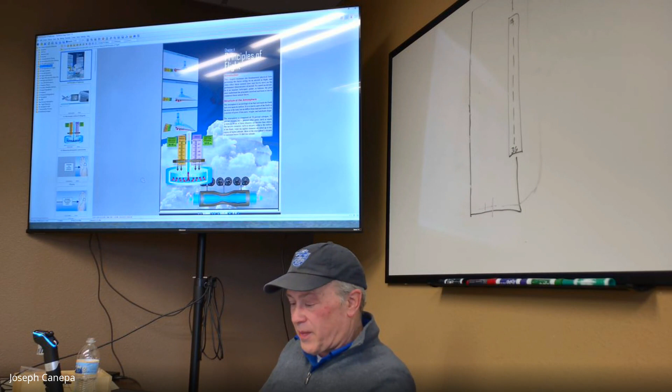I was hoping, I don't know if Vaughn is going to be here at all today. I haven't heard from her. So Vaughn Benson is another flight instructor, and she's going to get each of you signed up for the Young Eagles program, which in turn will get you the Sporty's private pilot program. It's like $300 for free. It's just included with it.

And it follows along with what we cover in the book. It's just another set of materials. They've got really good quizzes on there. It's just really nice material. So if she does come in, we'll have you guys come out, we'll visit with her for a second. She'll get you registered for Young Eagles, and then you'll get this free Sporty's program. And like I said, you could use it along with the ASA material if you want. So it's just another tool to help you understand some stuff.

And then next week, Ethan's dad, if he's still planning on doing this, was going to come in. Ethan's dad, Weston, is it Paper? Yeah. Paper is American Airlines. And he's also, correct me if I'm wrong on this, but he was a wing commander, right, in Madison. Okay, yeah. So he was military aviation. So he's going to come in and he'll be answering any of your questions. Aviation, commercial aviation, and then also military aviation.

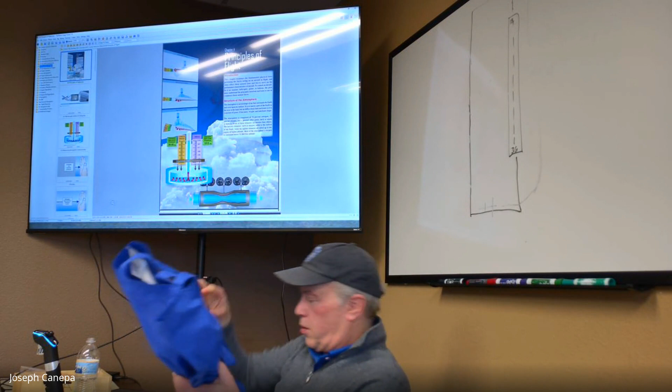So, morning. And what is your name? Traven. Traven. Okay, yes. You've been watching online, Traven? Yep. Do you have a kit? Okay. There you go, sir. Thank you. All right. And I think we'll just go ahead and get started. So let's hold that thought. I don't have anybody else. No. All right.

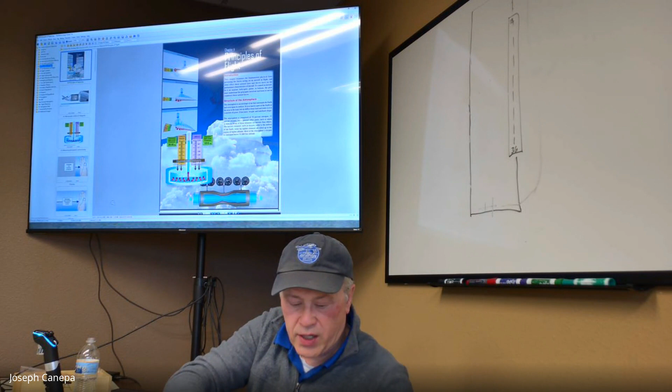So we're going to be going through chapter 4 this week, principles of flight. We're probably going to get into chapter 5. Chapter 4 is fairly short, but it's got some pretty complex stuff that we're going to need to understand before we move on to chapter 5. So if you want to put your books to that, it's 4-1 or 2 actually to start on. And actually, let's do just for like 5 minutes a quick review of what we talked about last week before we dive into this.

So I want to bring up our simulation here. Okay. So do you see those surfaces that are moving on the plane there? Does anybody know what those are? Ailerons. Okay, what about these surfaces right here? Flaps. Those are called the flaps. Okay, how about this one right here? What's that called? Yep. Okay. This right here. Yeah. Perfect. All right. Good.

And does anybody remember the different parts of the aircraft there? Okay, so let's actually go right here. What's that? Power plant, nose. Yep. Then obviously you probably know what this is right here. And then this whole area right here. And then this right here. Empennage. Right. We didn't talk about too much other than that. We've got obviously the tricycle landing gear. We talked a little bit about that.

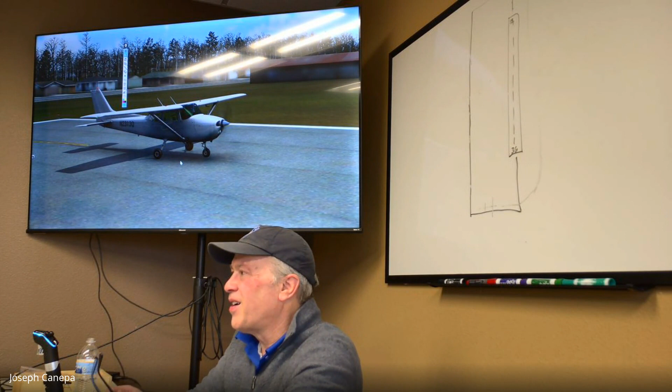For bonus points, does anybody know what a conventional gear aircraft looks like, or one distinctive factor of conventional gear? Instead of having the third wheel on the front, it's on the back. Yeah. This is a tricycle gear aircraft, and you know that because the gear is in the front. What Donnie says is for a conventional gear aircraft, the gear is in the back. It's usually like a little tire like this. We call them tail draggers. That's a term for them.

But usually what they'll do is they'll move the tires or the landing gear closer up front instead of having them back here. So that's essentially what a conventional gear aircraft is like. So again, tricycle gear aircraft is going to be something like that there. Okay. Gosh, there's not really much anything else that we talked about. Oh well, let's do this. So, the axes of flight.

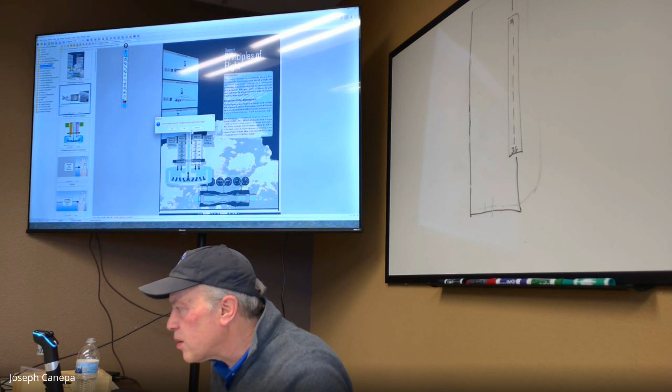So let's dive back into what we're starting out with today. Okay, so principles of flight. So we're going to talk a lot about air and what it is, what its qualities are. So you don't think about this, but air is actually a fluid. Okay, it flows, and it has weight to it. You don't think about that either. Does anybody know how much a column of air weighs? Like a square inch of air, if we were to actually weigh it. I'll give you a hint. You hear it occasionally in physics. You'll hear the term PSI, which stands for pounds per square inch.

Is that what you say? 15? Did you say 15? Okay. So you said about 5 to 10. Okay. It's actually about, you're close, 14.7 pounds per square inch. So this is hard to understand because we're living in all this air, down here on Earth, and we're used to the atmospheric pressure, which is roughly 14.7 pounds per square inch that's acting on the body, right?

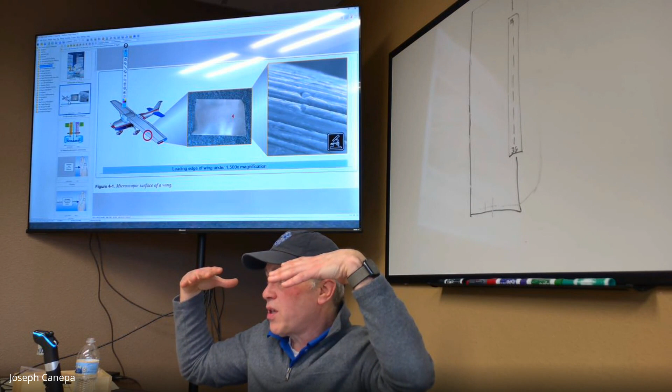So if I were to take a column that's essentially a square inch, fill it with air, and then just hold it in my hand, I would feel 14.7 pounds per square inch on the hand. And of course, I can't feel that because we're already feeling it all around our bodies right now. But if we were to weigh it, it would be 14.7 pounds per square inch. So air is a fluid, and it has weight.

The further you go up, so let's go up to 30,000 feet. Let's take that same column of air in this tube. Let's go to 30,000 feet. If we weigh it up there, is it going to be heavier or lighter? Lighter. Yeah, definitely. Okay, and we go further up, it's going to be even lighter. That should tell you something. That's something we're going to apply a lot in aviation, especially when we start getting into altimeters and talking about atmospheric pressure and stuff like that. It all relates to the pressure that we're feeling down here. So air is a fluid, and it has weight.

So in the book, they talk about viscosity. You're never going to see that on the written test. I don't even know if you'll see it on the commercial test, to be honest. But we do want to talk about it because viscosity does play into aerodynamics. So when we think of molasses, we think of a slow-moving fluid. Air has a viscosity, but it flows fast. Or another one to use would be water. So if we pour water down a ramp, it's going to go relatively fast down that ramp. If we pour syrup or oil down it, it's going to go a lot slower.

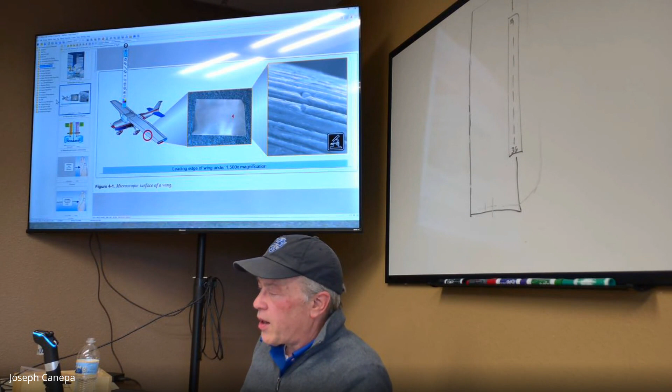Yeah. So there is drag on it. Yes, and I wasn't thinking about it in terms of that, but it essentially is drag. It's what we would consider parasitic drag. But the rest of you don't worry about it. We're going to get into that later on.

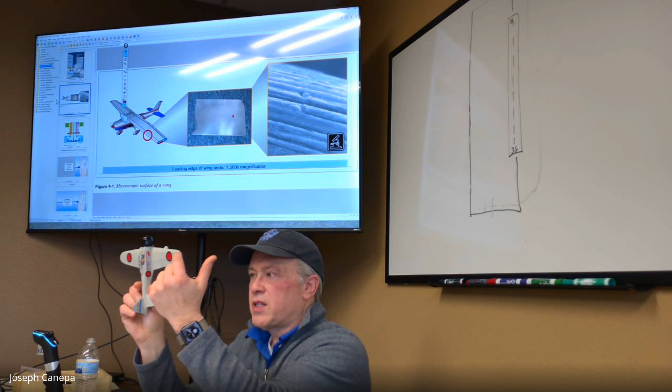So again, even what looks like a smooth surface is going to have some roughness to it. So here's a typical aircraft wing. You can see all these little lines on it. These are the rivet lines, so this would be like an aluminum aircraft. Those would be the rivets and stuff like that. They all create drag or friction in the aircraft.

So some airplanes like the Cirrus, they're made of composite materials and there's no rivets on them. So what you're going to see is a nice smooth surface. So the air is going to flow over that a lot smoother. There's not going to be any resistance to it. Okay.

And then this is on the next page, 4-3, atmospheric pressure. We've talked a little bit about that. So there is what's called a standard atmosphere. This is something you're going to want to know. You're going to see a ton of questions on this on the FAA written test. Essentially, a standard atmosphere is a way for us as engineers, as pilots, or whatever, to communicate performance figures.

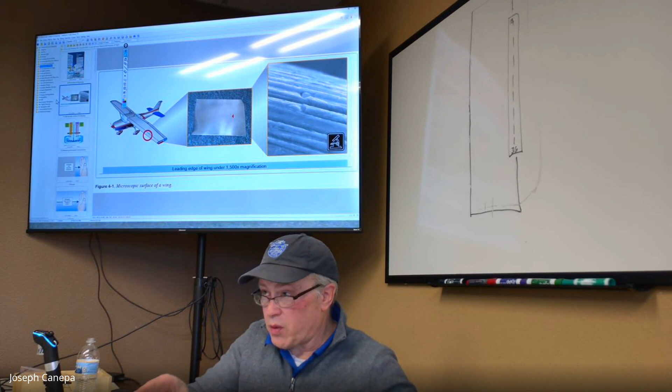Because the atmospheric pressure changes from one place to the next. If I drive over to Bearwood, the pressure there is going to be slightly different, because you've got changes in the atmosphere and the temperature. They all affect atmospheric pressure. Have you ever looked at a weather map and seen those little isobaric lines showing the pressure, like 29.8 or something like that? They're actually talking about air pressure at that station.

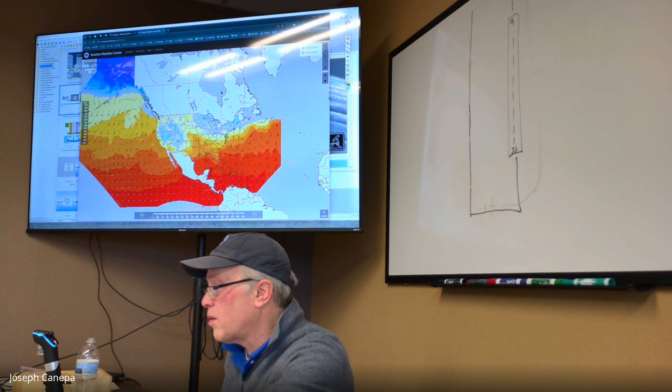So let's see here. Maybe I can bring one up. Give me a second. I'm just going to see if I can bring up another map here. Here. And we have no weather. That's unusual. Usually have some. So here we go. Okay.

So there's two different ways that we measure atmospheric pressure, two different units. One is inches of mercury, and you've probably heard this. A barometer has mercury in it, right? And what does a barometer do? It measures the pressure in the atmosphere.

So if I'm down here on the ground, it's going to be somewhere around 29.92 inches of mercury. It could be as high as 31 point something and as low as 28, which would be really low. We're going to discuss how that works in a second. But what these little isobaric lines do here is show us the inches of mercury. It can also be measured in hectopascals, and that's what this is right here.

Let's see if we can zoom in. Okay, so you see this right here, 1018. That's the hectopascals for that line, and that translates to something in inches of mercury. I don't know what it is off the top of my head, but here it looks like it's going down: 1018, 1016, 1014. So we're going from high pressure here, just north of Minnesota and into Canada, and the pressure is starting to go down.

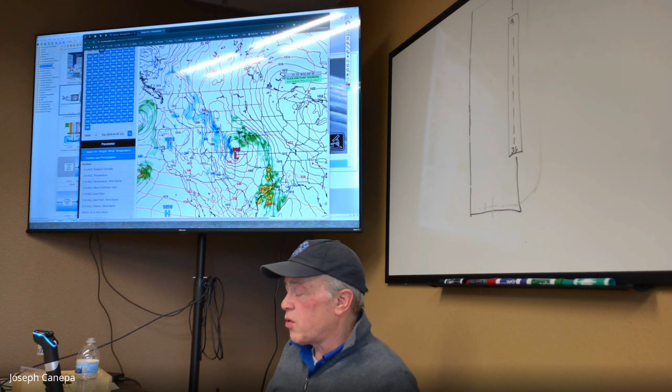So in other words, this hectopascal pressure measurement was made by either an observation station or was calculated through a computer model to calculate the pressure on the surface of the planet, that's what that represents there. Not at 10,000 or 20,000 or 30,000. That would be a totally different pressure. Okay, so now let's go back to our thing.

Now this is where it gets interesting. This is what we're gonna dive into, and hopefully some of you may get this right away and others may not. It's okay if you don't understand this right now, but by the time you're done with the class, you really need to have this concept down. So let's talk about atmospheric pressure.

So the way a barometer works, this right here is a container for the mercury. This area right here is a container, right? It's just like a beaker or something like that. In that beaker, you can see there's a fluid inside this container, and they've cut away this little chunk of the container so you can actually see inside there.

And then in the container of mercury, you've got a tube that's open down here at the base of the container, so the fluid can move up through that. And then there's a tube that goes up, and it's sealed at the top. So this is a basic barometer, and this is what they learned a long time ago, that they could monitor how far up that mercury moved to see if we had relatively high pressure or relatively low pressure in the atmosphere.

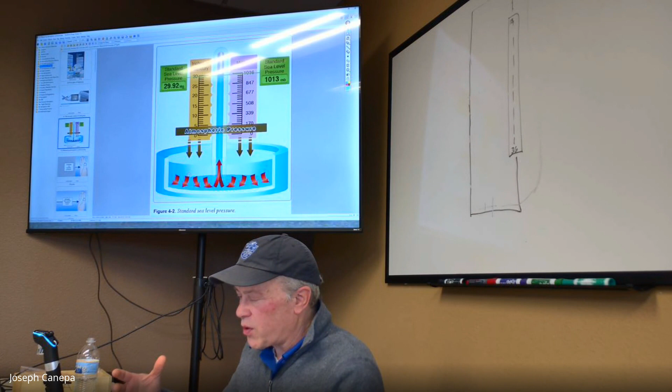So it doesn't do it smoothly. There are different portions of the atmosphere that we're going to get into in another theory, like the troposphere, tropopause, stratosphere, stratopause, and things like that. You don't have to worry about that right now; we're going to deal with that later on. But what we really want to talk about with lapse rate is the standard change in temperature and pressure as you climb.

So this next thing here, on your books you can see this too. There's the standard atmosphere at sea level. Right now we're about 900 feet above sea level. So our standard atmosphere for Reedsburg is going to be 28.86 and 13 degrees Celsius or 55 degrees. That would be a standard atmosphere.

That's not what it is out today because it's non-standard out there. You will very rarely go to an airport and find what's called a standard atmosphere, 15 degrees and 29.92 inches. It just doesn't exist very often. But we need to have that standard so that we can communicate these tables and do formulas for the performance of the aircraft.

But here we start out at sea level. So let's say we're at New York, you know, we're at sea level. So a standard atmosphere there is going to again be 29.92 and 15 degrees Celsius. If we go up 1,000 feet at New York, the pressure is going to what? Increase or decrease? It's going to decrease, yeah.

And you look at it, if you go down and look at the altitudes here, all the way up to 20,000. Here we are at 13 inches for the pressure. For our inches of mercury that we're talking about atmospheric pressure, the barometer would be reading 13.74 inches for a standard day, that is. Okay. And then for the standard temperature up there, it's going to be about, you know, roughly minus 24.6 degrees Celsius.

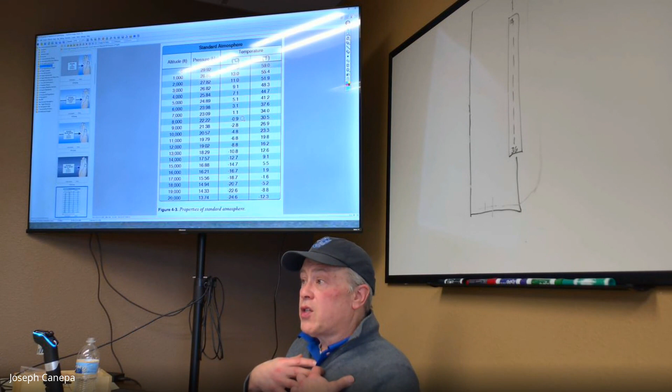Okay, so let's talk a little bit about engines. So engines, in order for an engine to work, it needs fuel, it needs spark, and it needs air.

Yep. Just see here. Okay, I just want to make sure that we're good here.

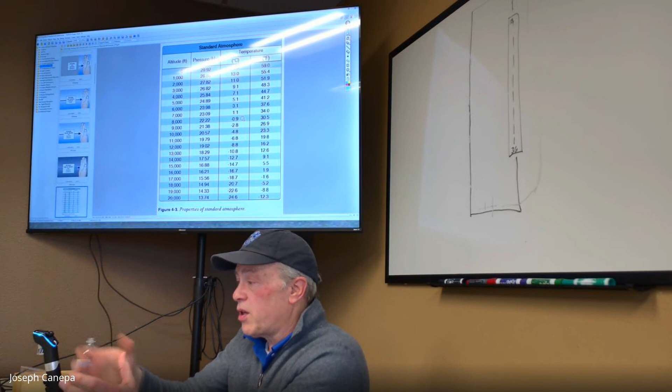Okay, so it needs air to breathe, just like we do. We need air to breathe. An engine needs air to breathe as well. Brings air into the cylinder, it burns that air, expels it. So as you go higher, there's less and less air. So a typical aircraft engine is going to lose power the higher you go, because there's less air up there. So that's one of the reasons why we need to know tables that we have to understand.

You don't have to remember these numbers. You just have to know that every 1,000 feet, you're going to lose about an inch of pressure, and you're going to drop in temperature by about 2 degrees. That's the lapse rate. Okay. That's something you will want to understand, and you definitely want to know this first one up here. So this right here is something you're going to want to know, the 29.92 and 15 degrees Celsius. And if you remember 59 degrees Fahrenheit, that's fine.

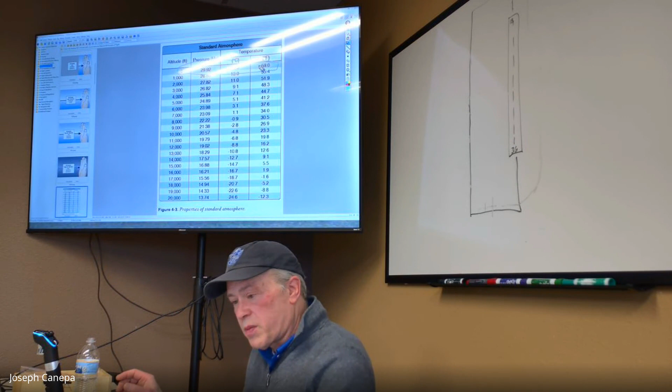You can always convert Celsius to Fahrenheit. I don't know if you know this, but on your E6B, it's got a nice little scale on it that converts Celsius to Fahrenheit. So if you know what Celsius is, you can always convert to Fahrenheit. All right.

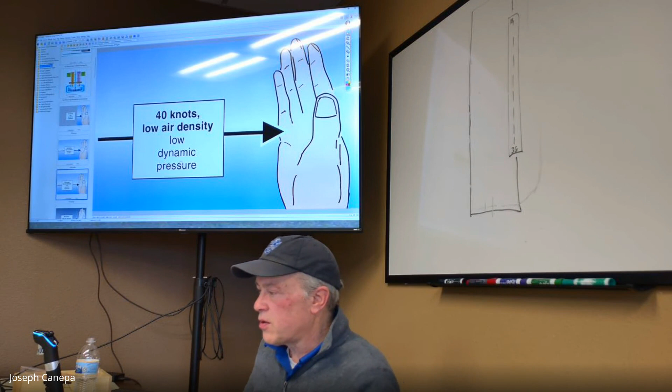So there's a term called pressure altitude that you're going to hear a lot. We use this when we do aircraft performance calculations. So let's see if I've got one here. They don't have anything there. All right, so pressure altitude.

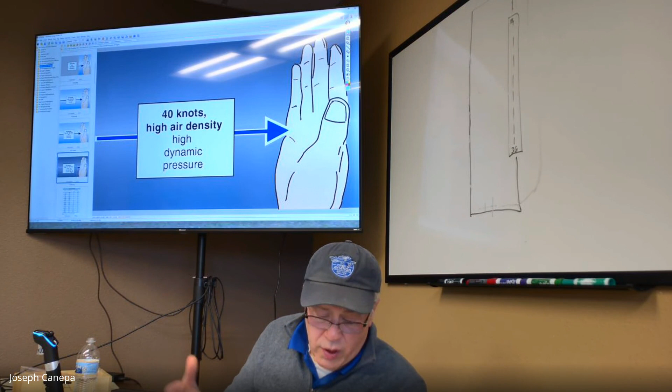In the book, it says pressure altitude is the height above a standard datum plane. Okay, that would be our standard atmosphere of 29.92. This right here. So this is our standard atmosphere at sea level. So pressure altitude is the height above a standard datum plane, which is a theoretical level where the weight of the atmosphere is 29.92 as measured by a barometer.

So we're going to dive into this. I don't want to get into this too much because it's almost too much to present to you right now. We're going to get into this in aircraft performance. You just need to know that pressure altitude is an important calculation when we're doing a long flight. It's not a problem if you're doing a short flight. If I'm flying from here to like Madison, I'm not so concerned about pressure, especially if you do the flight a lot and you're comfortable with the area. Pressure altitude isn't that big of a concern.

But if I'm flying across country, I want to know how well my aircraft is going to perform. And then I need to know these calculations. I need to know what this pressure altitude is and how well my plane is going to perform if I'm doing a long flight.

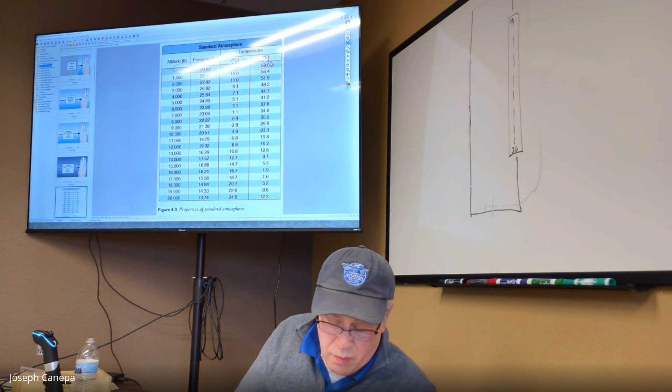Density altitude, let's just read it from the book. The standard datum plane, which again is the 29.92 standard atmosphere, 29.92 and 15 degrees, is a theoretical pressure altitude, but aircraft operate in non-standard atmosphere. Okay, so density altitude takes into account the changes in our atmosphere. We hardly ever come across a standard atmosphere. Like right now, we're in non-standard atmosphere. If I go outside and check the barometer and the temperature, it's not going to be the standard atmosphere. It's going to be something different.

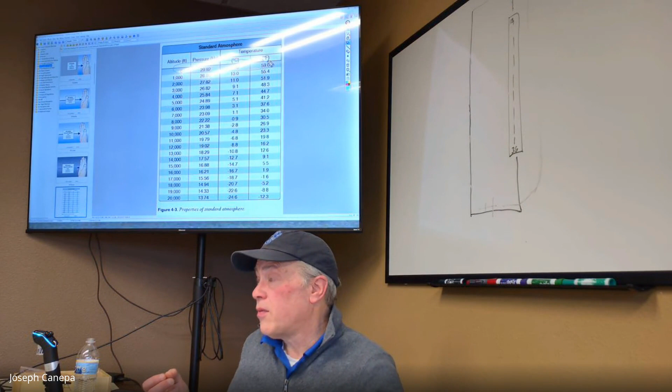So density altitude is basically a theoretical altitude that the plane would operate at if you were to take the temperature and the non-standard pressure of the atmosphere, and then it calculates an altitude. This is going to make more sense when we dive into calculations for performance of the aircraft. But on the test, it's going to ask you, does temperature affect density altitude? You're going to say yes, it does. Understand that temperature affects density altitude.

Well, let's go back a step. We talked about pressure as you climb in an aircraft. We're climbing up into lower pressure, generally speaking, right? So in a standard atmosphere, as the plane climbs, the pressure is going to decrease. What's going to happen to the temperature? It's going to decrease, right? So as I climb, we're going to climb up into cooler air, generally speaking. Now, there are times we have temperature inversions, where when you climb up, you're actually climbing into warmer air instead of colder. We often see that in the summer on a cool night.

So density altitude takes into account that temperature, because cold air, this is an important point. I'll let you guys answer this since you're doing really well. Is cold air more dense or less dense? More dense than warm air, right? So cold air is more dense than warm air. Why do we know this? We can prove it. Anybody ever seen a hot air balloon rise in the air? Yeah. Okay, so just think of a hot air balloon.

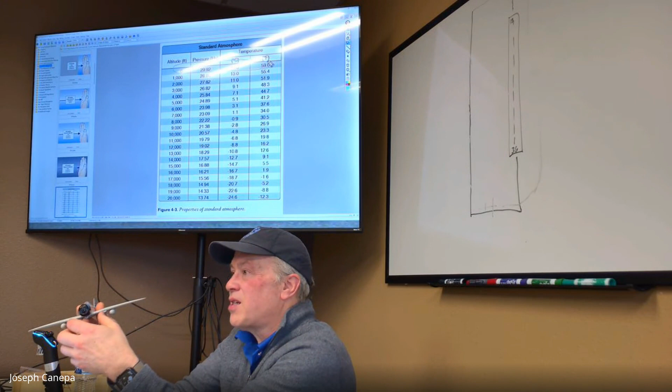The reason a hot air balloon rises is because the air inside the balloon is hot. It's warmer than the surrounding air, and so the balloon rises. So hot air is less dense. A lot of times you'll hear people in the summertime saying, "Oh, it's so hot and muggy out. The air is so heavy." That's not a correct statement. The air is actually extremely thin, and that's why they're having a hard time breathing.

You can correct your friends when they tell you this: "Oh, the air is so heavy on a hot, humid day." It's not. It's very thin on a hot, humid day for two reasons. Number one, it's hot. The other thing is humid air has even less particles in it, so it's less dense. Humid air is actually less dense than dry air.

So if you have a hot, humid day, the air outside is going to feel like it's maybe 4,000 or 5,000 feet altitude. So all that stuff I just described to you relates back to density altitude. Density altitude takes all of this stuff into account, right? It takes the temperature and the pressure, and it puts them together to give you roughly what altitude it feels like outside for your plane and for you.

If you ever want to, you can go on to several different aviation websites. We've got it in the SIA learning site. And you can look at some of the weather reports from all the different airports in the state of Wisconsin. We've got hundreds of them, but these weather reporting stations will report the altimeter setting, which is your atmospheric pressure, and they'll also report your temperature. But sometimes in the summertime they'll include a density altitude. So it'll say density altitude is 4,000 or 3,000.

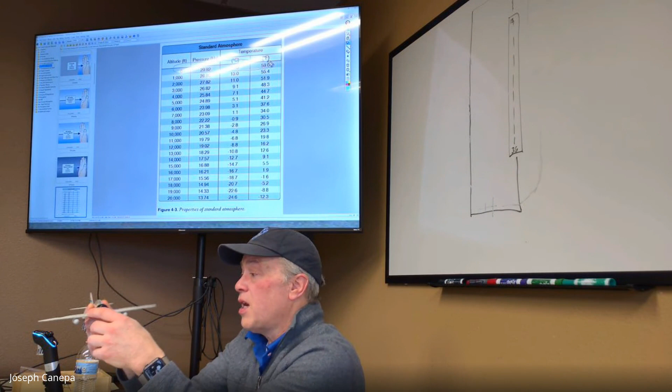So on a hot, humid day in summertime, you will oftentimes see density altitudes of around 3,500 to 4,000 feet. What that's telling you is the plane is going to act as though it's flying at that altitude, 3,500 feet, 4,000 feet. That's important to us because the plane does not perform as well at higher altitudes. You can still fly up there and it'll fly fine, but it's not going to perform as well.

And why is that an important point? Well, when you take off, you need what under the wings to provide lift? You need air. Yeah, absolutely. If you don't have enough air, it's not going to produce enough lift on the wings to get the airplane to climb. And there have been a number of accidents and incidents where pilots have taken off where there was a high density altitude, like out west. This happens a lot. They try to climb, but the plane just won't do it, and they wind up going off the end of the runway and landing in a farmer's field someplace because they didn't take density altitude into consideration.

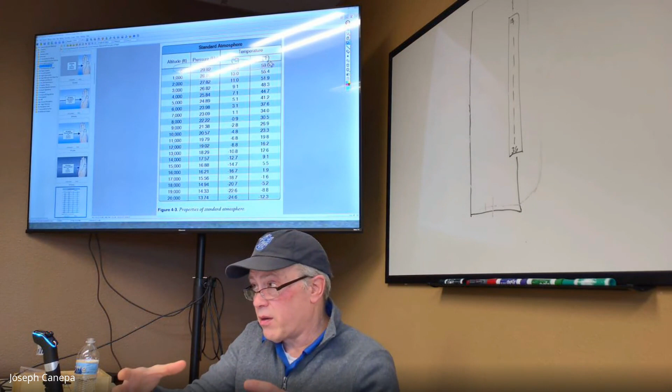Again, if you don't understand all that, it's not the end of the world. We're going to work on this later on when we get into performance and some of the weather theory. So, okay. All right, we talked about moisture. Dry air is heavier, is denser than humid air. Again, big concept. You need to understand that. And again, you can tell your friends when they say the air is really heavy today, it's not. It's very light, and that's why you're having a hard time breathing in the summer.

Okay, so now let's talk about production of lift. This is on page 4.5. There are several different laws that we go by in aviation that help us understand lift. So on 4.5 toward the end there, we'll talk about these one at a time. Newton's first law: every object persists in its state of rest or uniform motion in a straight line unless it is compelled to change that state by forces impressed on it.

Okay, so this little plane right here, I'm just going to set it right there. Can you guys see that? It's just demonstrating Newton's first law. There's no forces acting on it. It's not going to move. It's just sitting there. Now if I push it, I've got a force on it. I'm pushing right here. That's demonstrating Newton's third law: for every action, there's an equal and opposite reaction. So I'm pushing on it, and therefore it's pushing the aircraft.

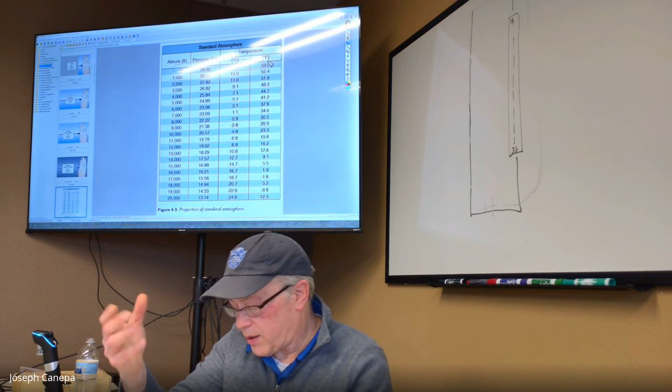All right. So the first law is every object persists in a state of rest or uniform motion in a straight line unless it's compelled to change that state by forces impressed on it. You can read that as much as you want. We don't really talk about that too much in aviation, just because planes move, and generally we're not so concerned about them being on the ground.

We're more concerned about what happens to the aircraft when it's in the air. So again, if an object is at rest, it tends to stay at rest. If I throw the plane, this is part of Newton's first law here. If I throw it, there's forces acting on it, gravity, and it's going to cause the plane to do kind of an arc like that.

All right, so that's demonstrating a little bit of it. It's going to basically follow that line. It's not going to deviate over this way because there's no other forces acting on it other than gravity. Throw it, and it's going to follow a nice little arc down to the ground. Okay. So again, their description, this means that nothing starts or stops moving until some outside force causes it to do so. That's basic common sense there.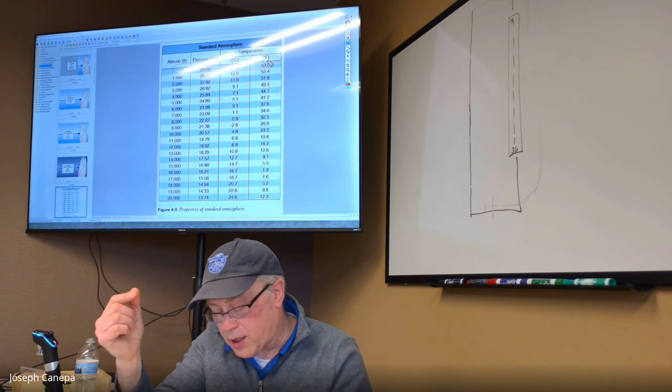Newton's second law: force is equal to the change in the momentum per change in time. So for a constant mass, force equals mass times acceleration. Again, we don't talk about this too much in aviation, but we'll deal with this. This is on the next page here. When a body is acted upon by a constant force, its resulting acceleration is inversely proportional to the mass of the body and is directly proportional to the force applied to it.

So in other words, if I put a lot of force into this and throw it, it's going to go a lot faster as opposed to if I just drop it. Okay, I'm putting more force into it. It's got mass. If it's got lots of mass, if it's like a bowling ball and I throw it, it's going to have a lot of force.

Okay, but in this case, again, we don't really use this too much in aviation. We talk about it maybe a little bit with stalls and other types of maneuvers, just because mass is an important part of aviation. If you're flying a really heavy aircraft, it's going to behave differently than a Cessna 172 or something like that. There's slight differences there.

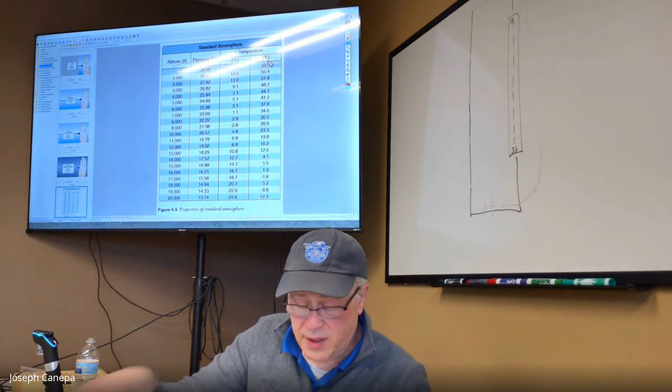So the big one though is Newton's third law, and this one you definitely want to understand. For every action, there is an equal and opposite reaction. So remember that we talked about this a couple of weeks back. You stick your hand out your car window and you hold it up like this. You've got the action of the air hitting that, and then the reaction is your hand kind of moving back and maybe up a little bit, right?

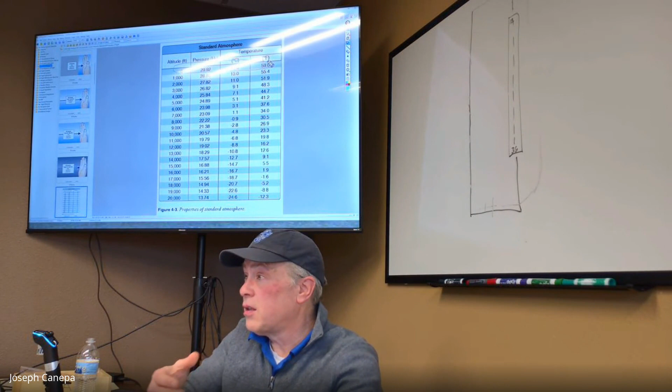Newton's law is stating basically for every action, there's air hitting it. That's the action. The reaction is your hand going up or moving back. That is essentially what helps us get the airplane into the air. Newton's third law. And then there's also another principle that we need to talk about, that is Bernoulli's principle.

So in the simplest way to demonstrate Bernoulli's, let's discuss what Bernoulli's principle is. It states, the faster a fluid moves, well, actually, again, pressure. Okay, so pressure of a moving fluid, liquid or gas, varies with its speed. I want to get this right. Bernoulli's principle states that as the velocity of a moving fluid, a liquid or gas, air, whatever, increases, the pressure within the fluid decreases.

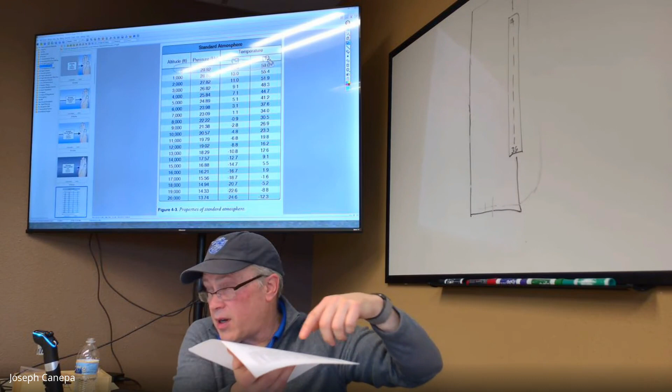Right now, I'm applying pressure to this sheet of paper, okay? So there's relatively high pressure on the bottom and relatively low pressure up here. What Bernoulli said was if I create a flow of air across this sheet of paper, something should happen to it. There should be lower pressure up here. And because there's lower pressure, there should be relatively high pressure below it, right?

Okay, so if I blow over this, we're creating a faster moving fluid, and Bernoulli said if you create a faster moving fluid, the pressure is going to be lower. Okay, that's what Bernoulli said. All right, so let's just demonstrate this. I'm going to try to blow on this as hard as I can. Sometimes it works, sometimes it doesn't.

It depends on the sheet of paper. But if I blow over this, what should happen to this tip of paper right here? Should it go up or down? It should go up if I blow hard enough on it. So let's see. Let's try once.

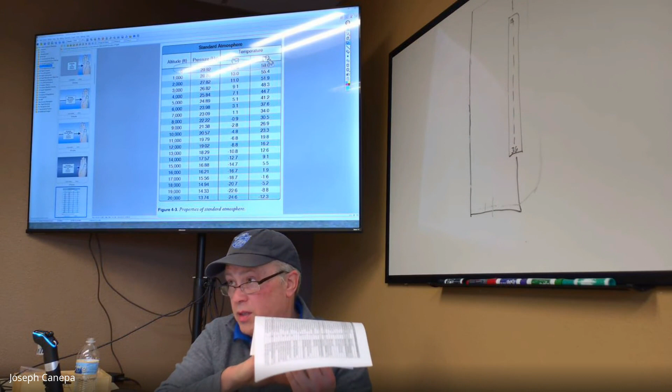Okay, did you see that? How the paper rose there? That was Bernoulli at work. Okay, that's not Newton. That is strictly Bernoulli. So the faster, again, the fluid moves over that surface, the lower the pressure on this side of it, and the relative high pressure is going to cause it to rise.

What you just saw there was basically what now we know as pilots what causes a wing to fly, and it's creating lift, along with Newton. Okay, there's two principles there, Newton and Bernoulli.

Just as a side with that, you could walk into any FBO like this and ask pilots what makes a plane fly. Is it Newton or is it Bernoulli? And you're going to get two totally different answers. Some will argue on it. It's definitely Bernoulli, or it's definitely Newton, or it's both, but it's based on these conditions or something like that. That's something that is still debated to this date.

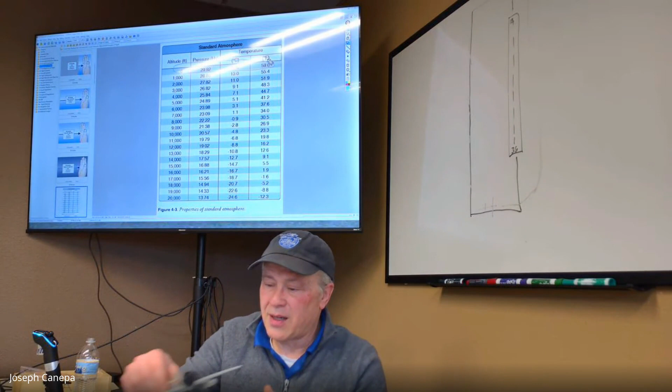Who produces the most lift? Is it Newton's third law, or Bernoulli? And my answer to it is it really depends on the condition of the aircraft. And again, we haven't gotten into this. We're going to do this next session, next hour. We're going to talk about angle of attack. And I think it depends a lot on the angle of attack of the aircraft. But anyway, we'll talk about that in a minute.

So again, that's those two concepts right there. Definitely want to understand that for the test, for the exam. And also to be a good pilot, you need to understand that because, without these basic principles here, you could make decisions as far as flying that are not in your best interest. You need to understand that. So, all right. So let's move on to airfoil design. So let's go here.

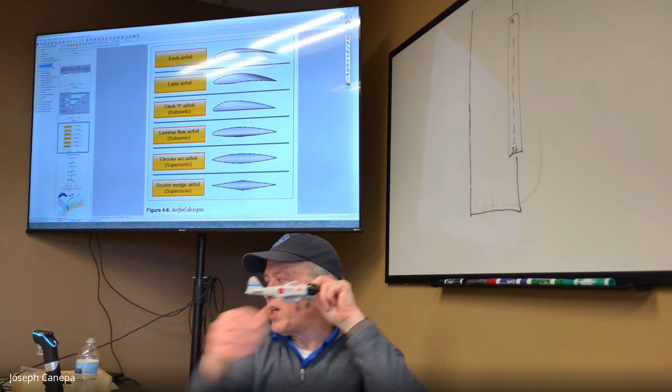All right. So there are different shapes of airfoils. I think they got it down here. Yeah, here's some different shapes of airfoils. This is in your book, by the way. You don't really need to dive too much into this. You're not going to see this on the test. Just know that this Clark Y airfoil, this is a cross section of the wing. If you're looking at it this way, there's a kind of a curve or camber to the top of the wing. That's what we're seeing right here. This is a cross section of that wing right there.

This is what a lot of general aviation aircraft, particularly the Cessnas, like the high wing aircraft, you're going to see this on the bottom of the wing. It's going to be relatively flat like it is right here. And then on the top, this is called the camber. That curve is called the camber of the wing. See how it's curved like that? And the cool part about this, let's go back here.

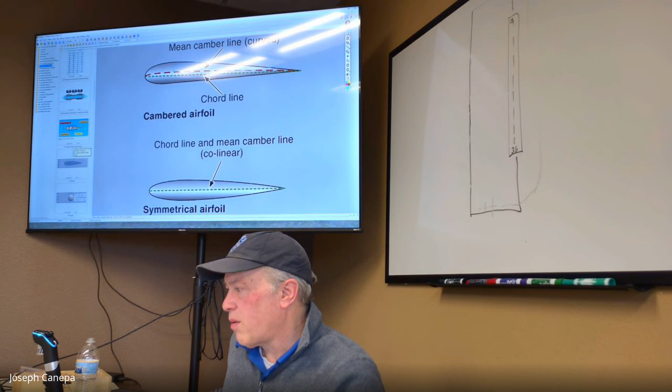There we go. So there's your camber right there. And you've got a lower camber, a little bit flatter on this side. Notice that it starts right here, but see how there's a real large curve right here and a low curve right there. Okay. So now we need to understand some terms here. If you write down anything, definitely write this down. We need to understand this.

So there is camber, and that's this upper portion right here. That's a term you should understand. That's the upper camber, and then you've got the lower camber. And in a lot of cases, like Cessnas, again, there is no lower camber. It's just basically a straight line going across.

And some Pipers, like in my Twin Comanche, it's got a lower camber as well as an upper camber. The Aeronca Chief that I have is totally flat. There's no curve to it at all on it. So different forms of wings, but they both have an upper and lower camber. It's just that the Chief doesn't have much of a camber on the bottom.

All right. So these other terms right here, chord, that's a term you're going to hear a lot, and you need to understand what it means. The chord is drawn from the leading edge of the airfoil, the very tip of the airfoil, all the way across to the trailing edge right there. So let's switch over to our plane here. Let's do it here. Right, so oops.

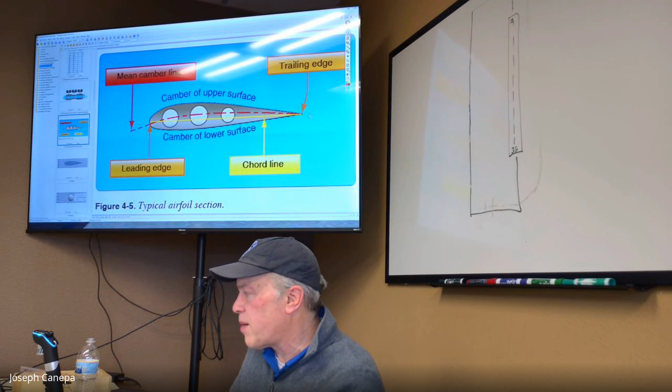Okay. And then, while we've got this, let's go here. All right. So here's air flowing over a symmetric airfoil. Let's show this in here. There we've got a little bit of Newton in here. We've got, for every action, an equal and opposite reaction. We've got this big wing hanging out here. So Newton is when the air hits this wing, it's resisting it. That's our drag. That's basically drag produced by the aircraft, or airframe drag.

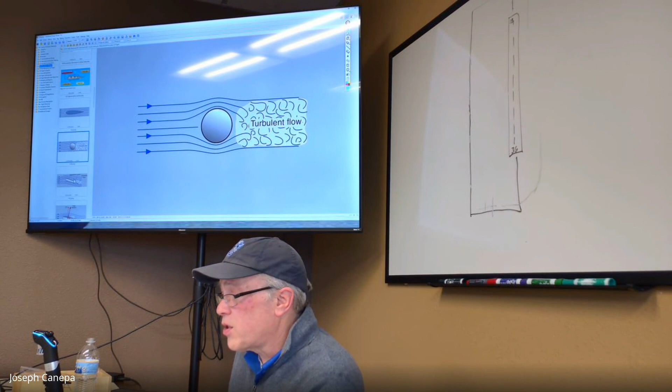So let's look at it in terms of an aviation wing. So this is a wing, let's say, from our Cessna 172 that we have. We've got air flowing over the top of the surface right here, and this is where it starts separating. We can see these little eddies starting to form. What happens is, as the angle of attack, I haven't introduced that yet, we're going to talk about that in a minute.

But as the angle of attack of the aircraft starts increasing, if the plane is flying in this direction, for instance, these little eddies right here start creeping up the surface of the wing, and eventually they get all the way to the top here, and they produce a stall. Don't worry about it. We're going to get into it when we talk about stalls a little bit more. We're just kind of introducing it here.

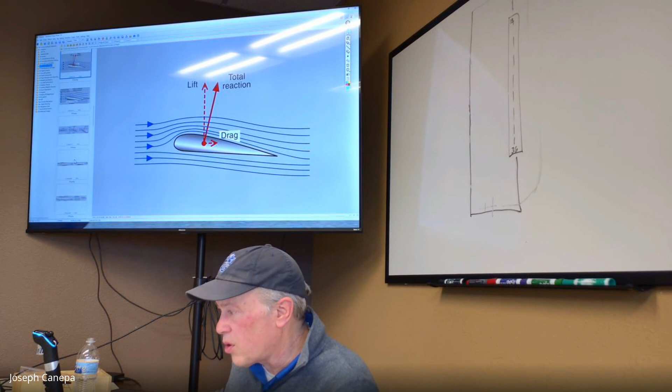All right. So this is a vector diagram of lift versus drag. Again, we know that anytime you produce lift, there is going to be some drag that's produced. In this case, you've got air flowing across this wing right here. It's producing some amount of lift because of Bernoulli's law. Here, you've got some air moving over the top of this. It's producing a little lift, but it's also producing a little bit of drag. So let's just bounce to another one here. I think I've got them in your book.

So this is in your book right here, on page 4-8. As air flows over a surface, let's use this right here. So as air flows over this surface right here, let's actually draw that. So if I've got air flowing this way, let's say we've got two molecules, one that starts here and one that starts here, and they're both flowing across the wing itself.

You're going to find that this one that's going over this curved area is actually going a little bit faster on the top part. And because it's moving faster, it's producing higher or lower pressure? Lower pressure, definitely. There's been discussion in the past about if you theoretically had two particles that you could measure, and you let both of them go at the same time in front of an airfoil, does the one on the top have to arrive at this point at the same time as the one on the bottom? And what they found was that the one on the top arrives here first, but the one on the top still travels faster.

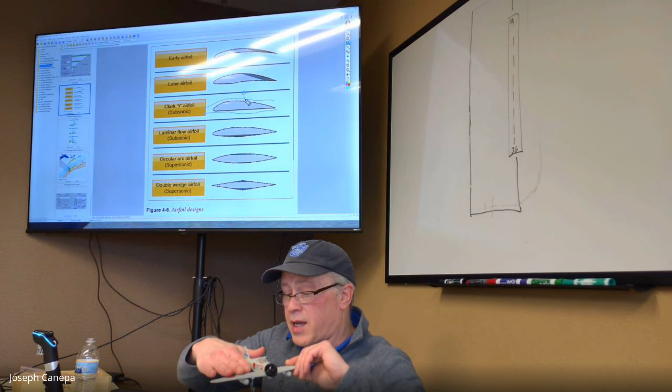So it's producing lower pressure on the top. So we've got lower pressure up here, and it's causing that wing to get sucked up. It's actually lower pressure, just like a vacuum. It's sucking the aircraft up, or it's producing lift. Whereas down here, you've got higher pressure, so it's going to cause it to rise. Okay. All right.

So now let's get into this a little bit more. I'm going to introduce one more concept to you, and then we're going to take a break. And that is angle of attack. So the angle of attack. Bear with me a second, guys. Let's see if we can back up for a second. I'm going to go off the book here because they do some of these things a little out of order.

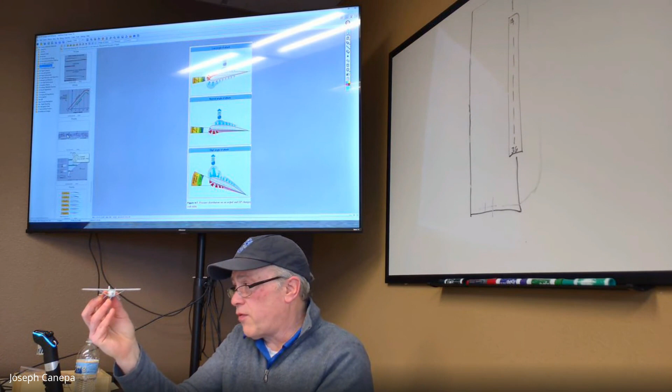There's a term called flight path in aviation that we use a lot. And the flight path is the path that the aircraft is moving in. So in this case, I'm flying my Cessna like this, where the flight path is like this. I know the flight path is that way because I'm moving it in that direction, and you can see it. I'm going to use my pen here. So our flight path is like this. So what's the flight path of this aircraft? Down. Yep, that's our flight path right there. It's going down.

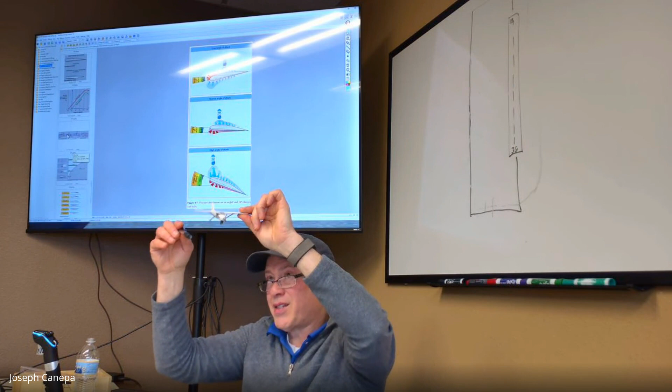What about this one? Yeah, so the flight path is that way. Generally, we fly with the airplane going forward. But you've seen aerobatic pilots, they do all kinds of crazy stuff. The flight path may be like that for some of them. Or if you're not controlling your airplane very well, your flight path may be down like that. So the flight path is the direction the aircraft is moving in. You need to know the direction the aircraft is moving in to know what the flight path is, at that particular instant.

So remember we talked about chord line, right? What's the chord line again? Anybody remember the definition for that? Trailing edge and the leading edge. Yeah, perfect. The leading edge and the trailing edge, it's a line. So here's our flight path right here. And we've got our chord line, which is going to be difficult, I'll show you on the screen here. So I'm going to put this on the plane. There's our chord line right there.

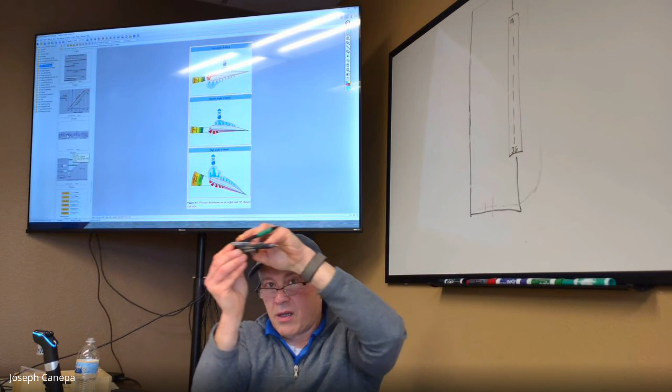There's our flight path. This right here is our angle of attack. So the green and black pen is representing the chord line, and our flight path is this black pen. This right here is our angle of attack. That's the angle between those two lines. This is a super critical point to remember. Angle of attack is the difference in degrees between your chord line and the flight path of the plane.

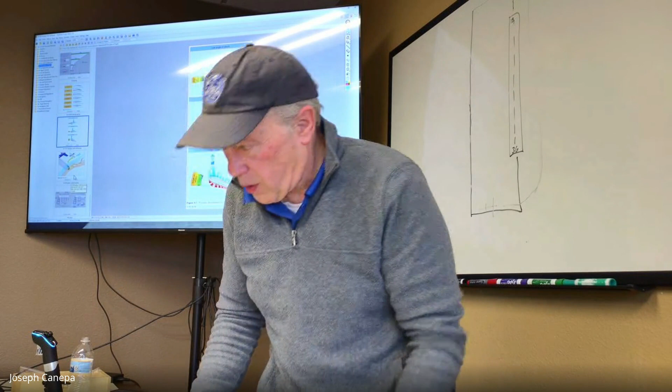All right. Expensive. I think that's... Yes.

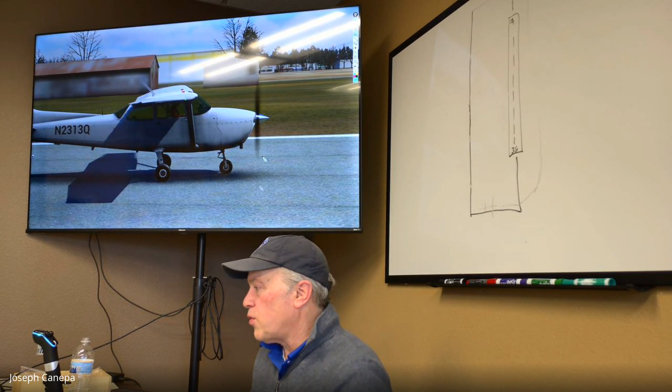And so the aerodynamic characteristics are going to be different on the ground than they are in the air. So let's get this plane up in the air, and then we're going to demonstrate some more concepts here. So let's switch this back here. This is Reedsburg, by the way. So this is a 172. I'm not too good with these sticks here. Well, we're here now, so let's pause it right there.

Okay, let's go outside. So here's our plane. All right. So I can actually show on here the flight path. Let's actually do replay here. So I'm just going to move it back just so you can see. Oops, it was too fast. So we can see the flight path of the aircraft, that big magenta line there. That's the flight path of the aircraft.

Let me draw that out so you can see it a little easier here. So our flight path is from here to here. Okay. Does that make sense? It's our flight path. It makes sense that the plane is going in that direction. So what we want to do here is talk about angle of attack a little bit. So we determine our flight path for the aircraft.

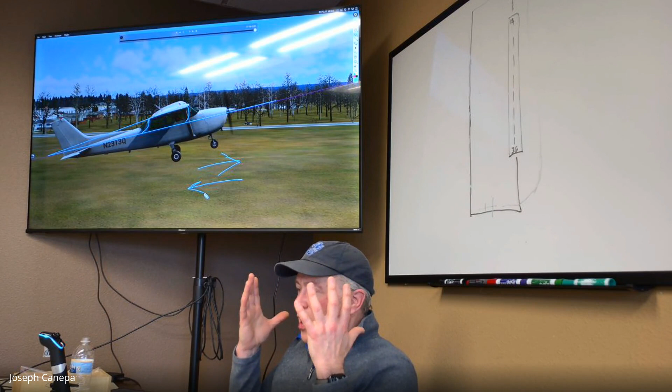So if I'm just standing on a sidewalk, I don't feel any breeze. There's no wind or anything like that. Let's say I'm just standing there. I'm not going to feel any wind on my face. But if I start running really fast, I'm going to feel a relative wind hitting my face. It's almost like a gentle breeze. If I run 15 miles an hour, which would be really fast for me, or anybody, I guess, I would feel a 15-mile-an-hour breeze across my face.

That's relative wind. So the relative wind is always relative to how fast the plane is moving, and it's always opposite of the flight path. That's a very important concept. Yes. Relative wind would be just the opposite of your speed, or? No, it could change. So what you're saying is if your plane is moving at 100 knots, the relative wind would be 100 knots in that direction. Is that what you're saying?

In a perfect atmosphere, if there was no wind at all, then yes, that would be true. But the problem is when you get up in the air, there's air currents that push the plane up and down. There's air currents that push it back, whatever. So you're in this air mass; if you could actually see an air mass, even on a relatively calm day, you would see little bubbles. If you could actually see air, you'd see bubbles of air rising. It would be almost like a boiling pot.

Now, in a thunderstorm, you're actually able to see that to a certain extent. It's amazing if you've ever been close to a thunderstorm. If you've seen an isolated thunderstorm as it builds, you'll see billowing towers of cumulus clouds or moisture moving up. So that's essentially what's happening in the atmosphere. But in a perfectly calm atmosphere, it would be harder to see some of that stuff, the bubbles or whatever. So to answer your question, it would be if the atmosphere was totally still.

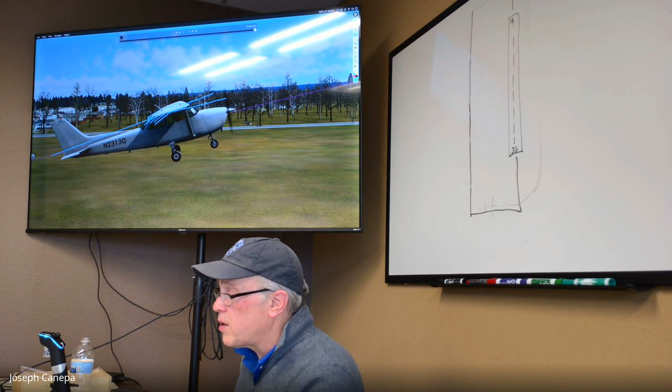Bernoulli, at the same time, is also producing lift up here on the top part of that curved surface. So let me see if I can draw this. We've got this curved line on the top here. That's the camber that I was talking about. So air comes along the top here. There's Bernoulli at work. The air hits the leading edge and goes across the top. It's got to travel really fast to catch up to the air at the bottom. It doesn't meet up with it, but it'll travel faster. Because it's traveling faster, we're getting less pressure up here, which translates to lift. So now we've got lift from Bernoulli and from Newton.

This is probably one of the concepts that even a lot of pilots I know don't understand. If you understand this stuff now, I guarantee your career in aviation is going to be a lot easier because you'll know what produces lift, whether it's Newton or Bernoulli. And if you go into aeronautical engineering, this stuff is absolutely required. So, all right, let's get into it.

They do talk about critical angle of attack. On page 5.3, there is what's called a critical angle of attack. Every aircraft is going to have a critical angle of attack. That's the point at which the wing cannot produce sufficient lift to keep it in the air. And can anybody guess what happens then? Yeah, the plane is going to stall.

It's not the engine. You hear the news media get this wrong. Well, I shouldn't say always, but sometimes they get it wrong. They'll say a plane stalled, and it's implied that the engine stalled. That's not the case. When we talk about airplane stalls, we're talking about the wings stalling. They're not producing sufficient lift, so they stop.

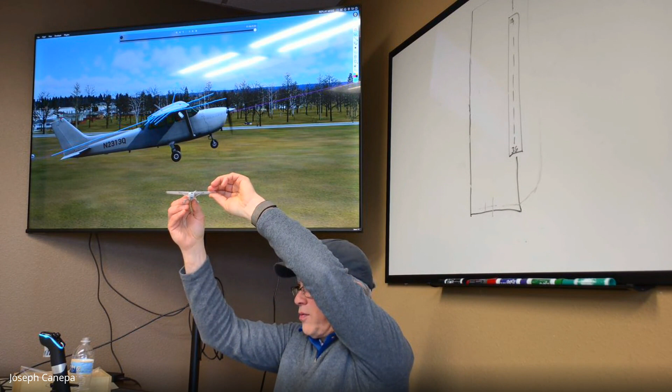What all you have to do to get out of a stall is, well, I'll let you guys decide, because you guys are figuring this stuff out really quick. How would you get out of a stall if, let's say, I'm right here? What would I do to reduce my chances of getting in a stall? Yep. I think everybody said it.

The first thing you can do right off the bat, if you've got altitude, is pitch the nose down. Just push the control yoke. It doesn't have to be aggressive. There is such a thing as a negative stall. You can actually push it so aggressively that the plane stalls in that direction. That would be an extreme, but it is possible. So you want to do a very gentle, just relax.

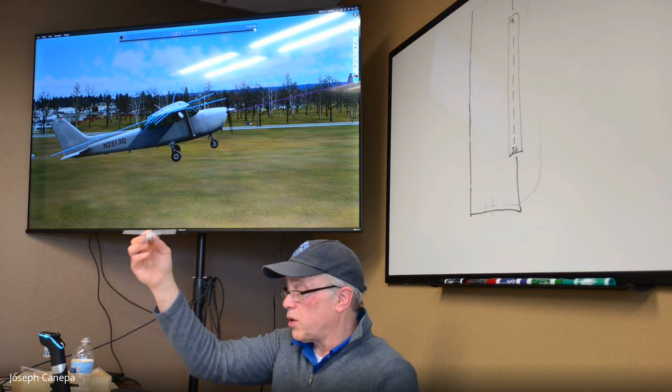Oftentimes you just let go of the control yoke, and the plane will correct itself. It'll just fly out. If you've got it on a trim, it may not, but generally speaking, if you just let go of the control yoke, the plane is going to fly out itself. Okay, so that's what we call a critical angle of attack, and every plane has it. The critical angle of attack for most airplanes could be as low as 15 degrees.

This angle right here, let's actually put all this stuff up here. Let's draw this again. So again, this is our flight path right here, and our chord line is from the leading edge to the trailing edge. I'm going to draw that, so it goes through the trailing edge there. There's our angle of attack right there. Okay, so you can see it. That right there is our angle of attack.

So the critical angle of attack for most planes is anywhere from 15 to 18 degrees. In most Cessnas, I think it's around 17. Don't quote me on that, but I think it's around 17 degrees. So let's test this out. Let's actually do a stall in this plane. I'm going to do something that I would never do in real life, and that's a low altitude stall. If we were up flying, there's no way I would do something like this.

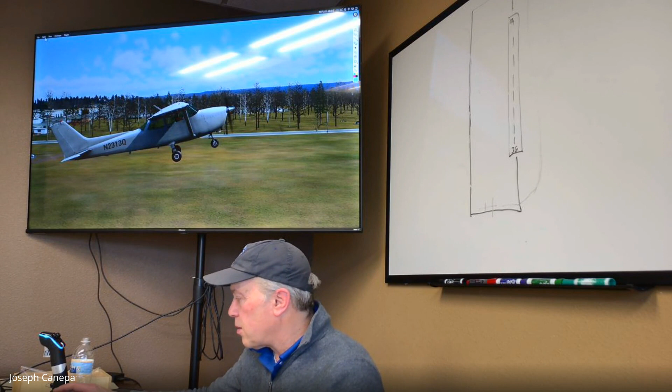But because this is a simulator, of course I could probably just raise the altitude, but for the sake of the class, I just want you guys to see what's happening here. So let's go ahead and clear all this stuff off here. Let's go. All right, so there we go. All right, so we're climbing here. Gotta make sure we still climb.

I'm going to switch back to my view here. All right, so we're going to get into a climb here, get it up nice and high. And what I want you to do is look at the, we're actually probably in a stall right now. Let's pause it here. Okay, I can tell we're stalling the plane right now, and the reason I can tell is because the plane is descending. I've got my nose up.

So let's take a look at this. This is a good example here. If I were just to see this airplane, it looks as though it's flying, right? But look at the flight path right here. You can see our flight path is going down, but yet my plane is pointing up. So that's the direction the aircraft is flying right there. So let's do our chord line thing here.

So there's our blue line right here, the flight path. It's right here. Okay, and let's take a look there. Now you can really see it. So there's the leading edge right there. We'll do the chord line, from the leading edge of the wing to the trailing edge.

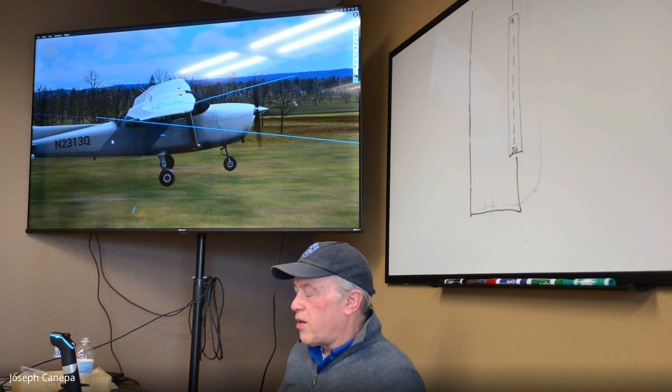So I want to bring that angle of attack from here down to here. I'm going to decrease it. That'll get air flowing over this portion right here, and then we'll be able to fly. So let's test our theory out here, and hopefully we won't crash. So let's go ahead and clear this out, and let's switch back here. All right, so there we are. We've got a lot of altitude. If I crash here, this will be really embarrassing, but it's possible.

So the first thing I'm going to do, well, I can't do anything with the throttle, so I've got max throttle right now. But one thing I can do is lower that pitch, right? Okay, so are you all ready? Here's what's going to happen. I'm going to go ahead and pitch over. I'm going to unpause it. Okay, I'm going to pitch it down. Whoa, oh, yeah, okay, we damaged the plane. So I was too aggressive on the pitch down.

So now this is a good lesson, because this kind of thing does happen to pilots. In real life, the stall warning would be going off. You'd hear a warning saying the plane is coming close to a stall. I have the sound turned off here. And you'd hear like a horn going off, warning you that there is a stall. That's called an imminent stall.

And in this case, I didn't hear it. I should have been watching my airspeed indicator, and I wasn't. So we'd probably walk away from this, but the plane would be a total mess. It would not be good.

But this is the reason why we have to understand all those, the flight path, the angle of attack. We need to understand that stuff if we're going to fly a plane safely. And this is why we go through all this stuff and talk about it. So again, critical angle of attack, flight path, relative wind, all those terms we need to understand. Okay. All right.

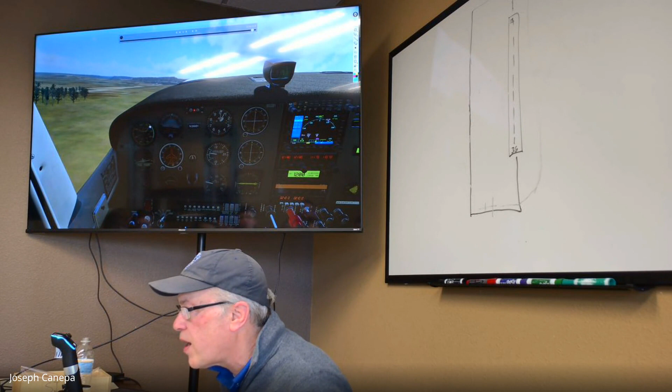Let's see if this is. I don't know if it is, but let's see. Okay. Okay, those warnings there are all. Oh, that's our ELT that's going up. That little pew pew pew pew sound. Can you hear that? Oh, there's your stall. Yep. So you can see there.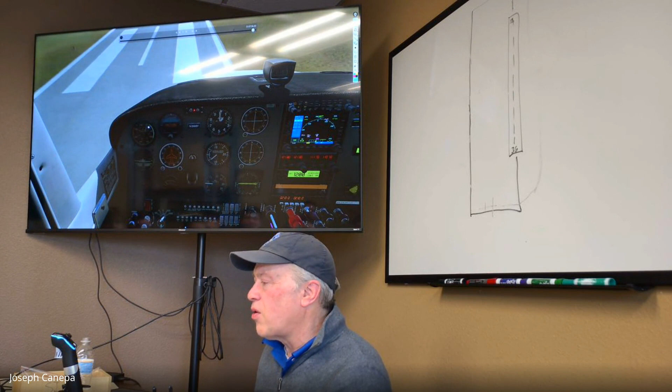So this, and again, did you guys see where it actually? Let's go back up here a second. So I'll do it in slow motion. So that's another thing I would have done: I would have checked my ELT. Okay, so you can see our airspeed is really low, and I can pull back as much as I want. Right now, I'm starting to pull back. Actually, let's do this again. Let's go here.

Okay, so watch the control yoke. What I'm doing at the control yoke, there I'm trying to break the stall. We're losing lots of altitude, and now I'm pulling back to avoid the ground. Instinctively, I'm pulling back. I want to see if I can flare it. We obviously hit really hard, damage the nose. Again, we probably would walk away from that, but we wouldn't feel really good about it.

So that little buzzing sound, that's the stall warning. I don't know if you can hear that from where you guys are. There's like a buzzing sound. That's the stall indicator. Let's try this again. There's the little buzz right there. It is the stall. Okay. So let's go back a little further.

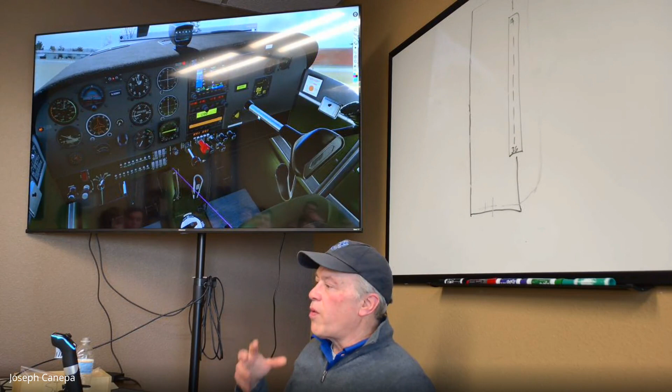Okay. All right. So you can see I've got that control yoke so far back and it's in the stall now. Now I nose it over and we instantly lose all that altitude. So it really didn't illustrate the point that I wanted to get across, which was that when you decrease the angle of attack, you're going to produce more lift. In this case, we just ran out of altitude and airspeed. We just didn't have enough to save us.

Normally, as Max said, when you're flying, you do your stalls at like 3,000-4,000 feet. You're not going to do a stall near the ground intentionally. It's way too risky. So, okay. Does that help with the concepts a little bit? Does anybody have any questions on this stuff at all? Yeah. How much do you think that repair cost would be? Because he slams right into the engine.

I don't know. So, it's a good question, and I will answer that because we probably have a little bit of time here yet. So, an engine, depending on the type of aircraft engine, is going to cost anywhere from a bare minimum of $20,000 to, on a general aviation aircraft, up to $60,000 for a rebuilt engine. The prop has to be replaced, because anytime there's what's called a prop strike, you have to replace it. Landing gear is damaged, skins. What's that? Shock damage, definitely. Yeah, the airframe is going to have to be fully inspected.

You'd be surprised what small planes can take. So I have a twin Comanche, and I bought it after a guy crashed it, which sounds really weird. Why would you want to buy a plane that was crashed? Well, the thing you need to understand about aircraft is that, like we learned in structures last week, they're made of aluminum, so you can fabricate aluminum in your own shop. So I took it to a mechanic. He was based here at Breezebury, he's now in Maryland, but he basically did all the work on it.

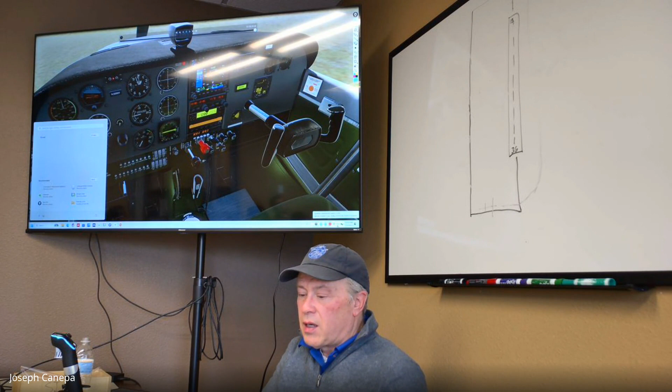Obviously, if there's a fatality involved, then they want to get involved. Or if you're endangering somebody on the ground, that's where the FAA says, we need to look at your license and see if you're really fit to fly. So the FAA is strictly looking at the safety of the public, the pilots, other pilots. If that person poses risk. In this case, when the guy landed, he wasn't posing a risk to anybody, and it just damaged his plane, unfortunately.

Okay, let's see. How do we control lift? Okay, so I hear flaps. I hear thrust. What else? Angle of attack. Yep, angle of attack, and speed, definitely. So all those things kind of tie together, right? We can use angle of attack if we've got enough speed, to a certain point. But once we hit that critical angle of attack, the plane's going to start descending.

Your plane may be pointed like this, but like we just saw in the demo there, the plane was actually descending like that. That was our flight path. It was down like this. So flaps definitely improve lift. Now let's get into that. Why do flaps increase lift?

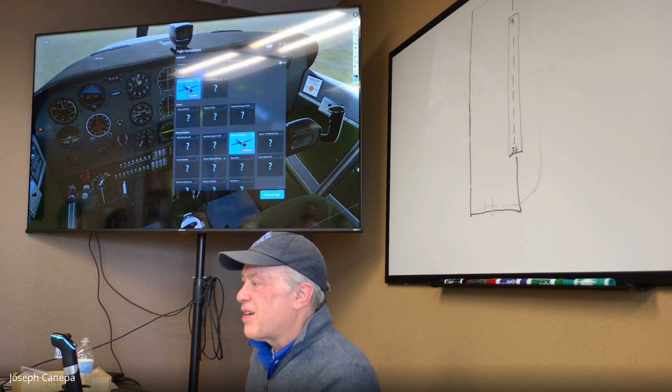Let's see if I can do this here. Oh, I gotta start this again. Does the flaps angle go down? Well, sacrificing speed. Yeah, let me show you. What's that? Where is he again? Oh yeah, that's that. Change the page. Let's go here. Start the flight.

Okay. Yeah, and actually I don't know why that would have gone off, because it was going off before we actually landed, so crashed. All right, so let's take a look at why when flaps come out, they produce more lift.

Circle here. All right, first off, all right, I'm gonna have to take off again, right? Yeah, because we need to see it. So, sorry, I'm going to do this from the back. Some of you guys, if anybody's ever done remote flying, can probably do this much better than I can, but I'm not really too good with this here.

So see how the plane is kind of turning to the left there? See how it wants to turn to the left? I've actually got right rudder in it right now. See, it's really going off to the left there. It's just terrible. So, all right. Are you controlling the rudders by twisting the control yoke there? Which is not natural.

It's like, all right. So I think it's worth $150 for pedals at this point. Yeah, it really does help. You'll find if you do have rudder pedals, they'll start getting you into the habit of using your feet. And it seems really weird, but if you fly enough, like if you do a long day of flying, there's been days where I've flown literally 8 hours straight.

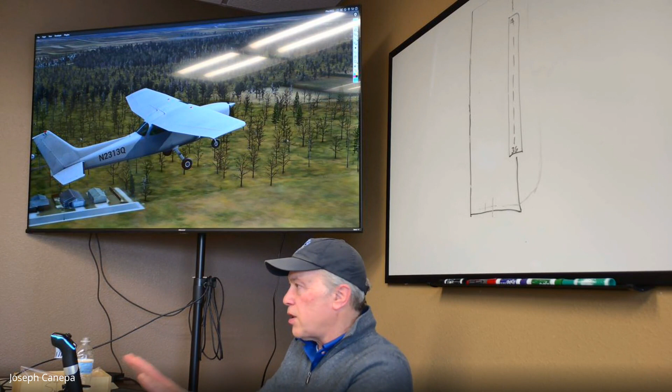And I got on the ground, got into a car, and I got confused between which foot to use for gas and brakes, because the rudder pedals control that rudder. And so I'm used to doing that all the time, turning right, left, whatever. So when you do that enough, when you get to that point, then you understand how the rudders are working. But it took me a while to get there.

So let's see. All right, so let's go here. So we're talking about flaps now. So first off, let's take a look at our flight path here. Let me zoom up here. There's our flight path right there. You can see that behind us. Let me just draw a line here so you can see, and extend our flight path. So we know the flight path is like that. That's our flight path right there.

Let's draw our chord line. Again, leading edge of the wing to trailing edge of the wing right there. I just want to make sure that it extends all the way down there. So there's our angle of attack. All right, so now what we want to do is extend the flaps. I don't know if we can do it in pause mode. Okay. So this right here is, again, the leading edge of the wing to the trailing edge. This kind of gives you an idea of the present angle of attack that we have there. Okay. So now we continue on.

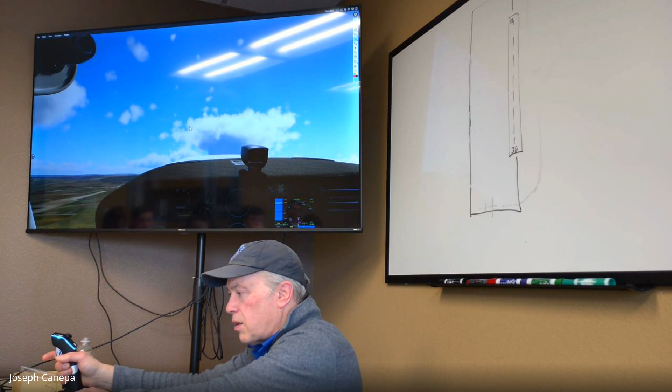So let's go back inside here and pause it. Actually, let me do this. Let's switch back here. I'm going to try to do this. This is a tough angle to fly from. All right, so I'm going to start bringing out our flaps here. You can kind of see them dropping there. The flaps dropping. All right. So now, right there, I'm going to pause this a second.

All right. So now let's take a look at our angle of attack. So again, all we're really concerned with is the chord angle in relation to the flight path. We don't really care that the plane is pointing up in the sky like this. We're really more concerned about the flight path and the chord line for the angle of attack. So let's go ahead and do this. I'm going to just extend that flight path right there. And here's our flight path. And now let's take a look at where the angle of attack is there.

So let's go here. Zoom in. So again, our chord line is what? Leading edge to trailing edge. All right. So let's do this. There's the leading edge right there. The trailing edge is no longer here. It's at the bottom of the flap. You see that? Okay. See how much of a steeper angle we've got there?

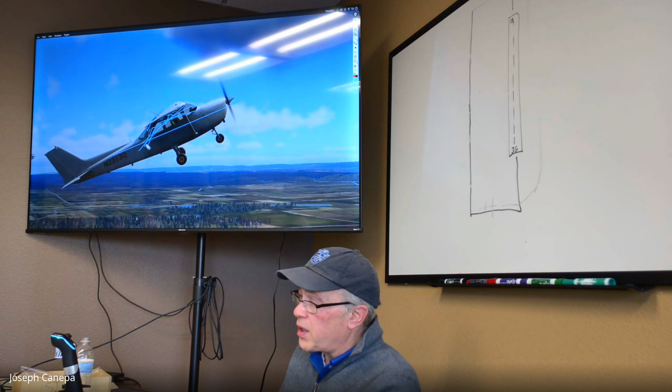But air that's hitting that flap is also creating downwash. It's going down like this. So we're actually producing a lot more lift here because of that flap being down there like that. We've changed the chord length. So again, our angle of attack has shifted just by adding the flaps in there. And now we're producing more lift.

Because we're producing more lift, what's a byproduct of lift? Drag. Yeah, we're producing drag. Okay. So anytime you produce lift, you're going to produce drag. It's part of life. All right. So now let's continue on and let's do a stall with the flaps on, just so we see. Maybe I can cover from this one. So let's go here.

Looks pretty high, but notice our airspeed, can you see that there? There's the white arc right there. And then there's our needle right there, and it says that we're at about 60. This time, I should have no problem getting out of this. We're getting close to a stall here, but we're not actually stalling the aircraft. So let's try this time.

What's that? Well, keep in mind that that's just a reference. The plane can stall. I could get this plane to stall at 70 knots or 80 knots if I wanted to. That's just a reference. And that's an important concept. I'm glad you brought that up, Donnie, because a lot of people think that those stall numbers on the airspeed indicator are hard. As long as I stay away from those numbers, I'm safe, right? Not true. You can stall an aircraft.

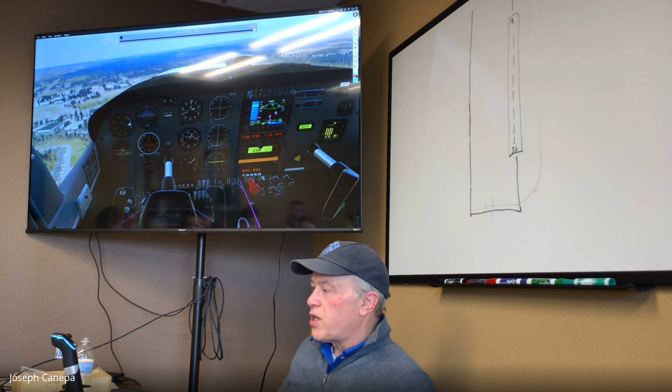Yep. Can't you also calibrate that for the instrument? Yeah. There's several different types of airspeed that we talk about. And we'll get into that when we get into airplane instrumentation, but there's what's called indicated airspeed.

Anytime you hear the word indicated, it means what you're reading off the panel, okay? Indicated is what is indicated on a panel gauge or something like that. There's also calibrated. So in this case, there is such a thing as calibrated airspeed. And then there are several different types: there's indicated airspeed, calibrated airspeed, the other ones. I know there's like two others that you'd use.

Most of the time, you're just going off a calibrated airspeed. I'm sorry, indicated airspeed. You use calibrated airspeed when you're doing flight planning. If I'm flying a long distance, I need to figure out what my real airspeed is so I know how long it's going to take me to get somewhere. So that's where we would use something like that.

And we're out of time, guys. We did cover a lot today. Hopefully this is giving you kind of an idea of how some of this works. Can you see now why I want you guys to actually either fly in a plane right now or fly the simulator? Because this stuff will give you a chance to use the rudder pedals and get out of some of these situations that we're talking about. So for next week, just plan on doing the rest of chapter 5, which is aerodynamics of flight.